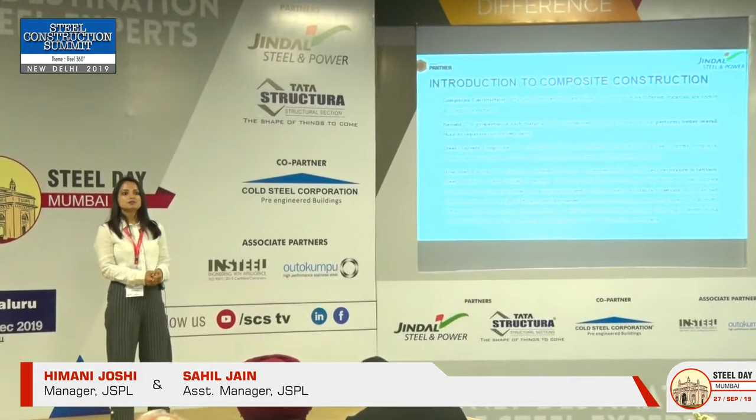Now let's have a quick introduction to composite construction for the benefit of those who are comparatively new to this. Composite construction is a construction which uses two structural members which are made up of two or more different kinds of materials.

Why this is done, what is the benefit of combining two different kinds of material, is that the best properties from both the individual materials can form an aggregate which performs better than how the two units would have performed individually.

So we have seen many types of composites in construction like concrete and timber, steel and timber, but the most common and the most efficient type of composite is the steel concrete composite, and this is what we are going to talk about here. So why steel and concrete?

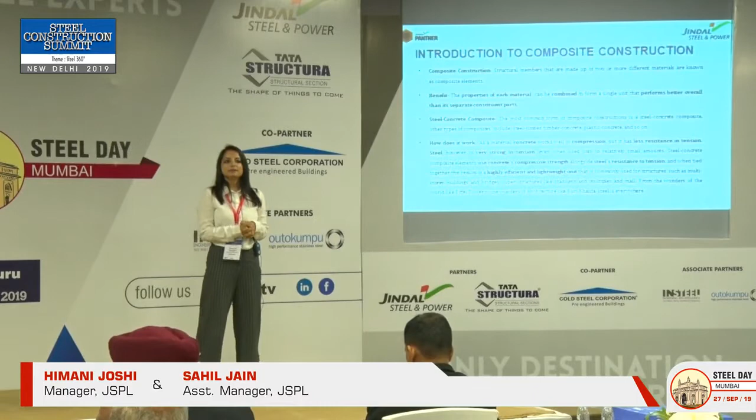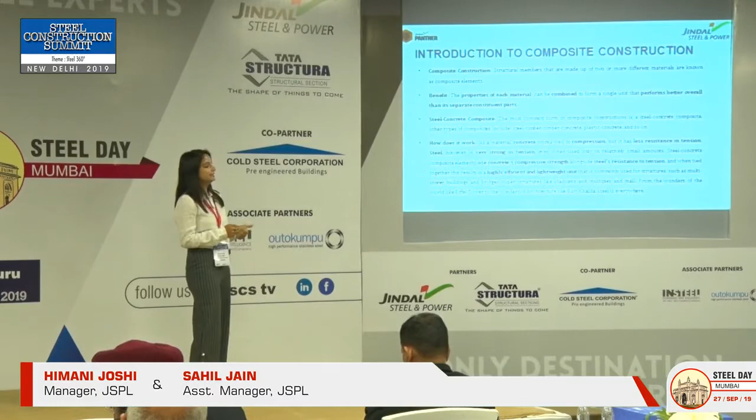Because concrete has been used in construction from time immemorial because of its high compression strength. It goes very well with compression. Steel, on the other hand, has a very high resistance to tensile forces. So when we combine these two, we get a highly efficient and lightweight unit that resists better to both compressive loads and tensile loads, which is what we require for high-rise buildings, complex superstructures like malls, multiplexes, bridges. So this makes it an apt choice.

So we can say that right from the wonders of the world like the Eiffel Tower to the wonders of architecture like Burj Khalifa, steel is everywhere.

So composite construction, let's go into a little more detail. It mainly consists of two basic parts: composite columns, that is steel columns encased in concrete, and the next one is steel beams which support the concrete floor slab systems.

Now in order to achieve a faster construction, even without encasing the steel column, we can go up to 4 floors. And with slab concreting, without encasing, we can go up to 2 floors. So simultaneously, we are doing our erection of the steel columns, and simultaneously we are also doing the encasing. So the concreting part and the erection of steel structures is going hand in hand, which gives us a much faster pace of construction.

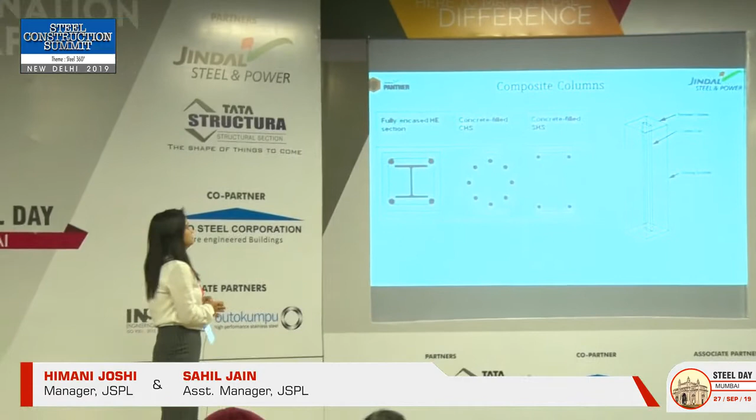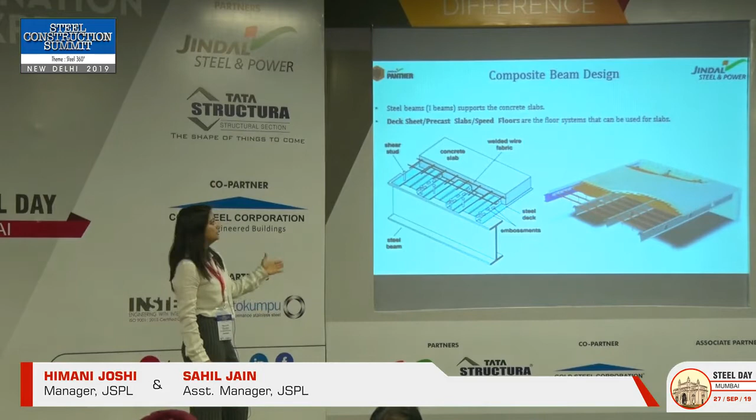Now coming to the second most important component, the composite beam design. A composite beam is a steel beam which supports the concrete slabs or the concrete flooring system. These flooring systems can come into various different kinds. The three most popular of them are the deck sheet, the precast slabs, and the speed floors. These pictures demonstrate how the steel beams support the deck sheet on the left one and the speed floor system on the right one. We will see in more detail about these flooring systems in the coming slides.

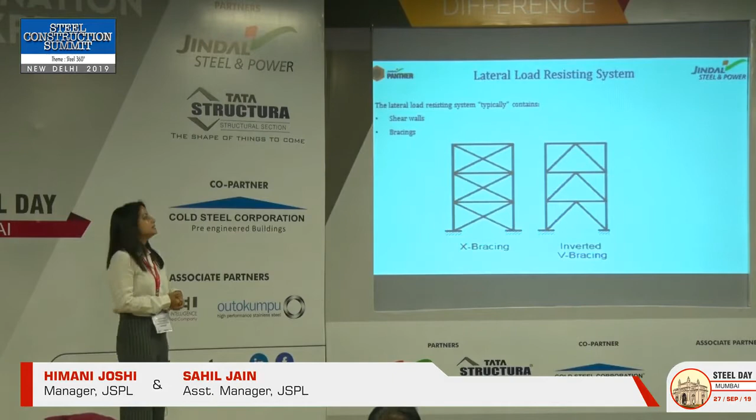The third most important part of a composite construction is the lateral load resisting system, which consists of shear walls and bracings. Bracings come in two types, X bracings and inverted V bracings. V bracings help us save some space in the building.

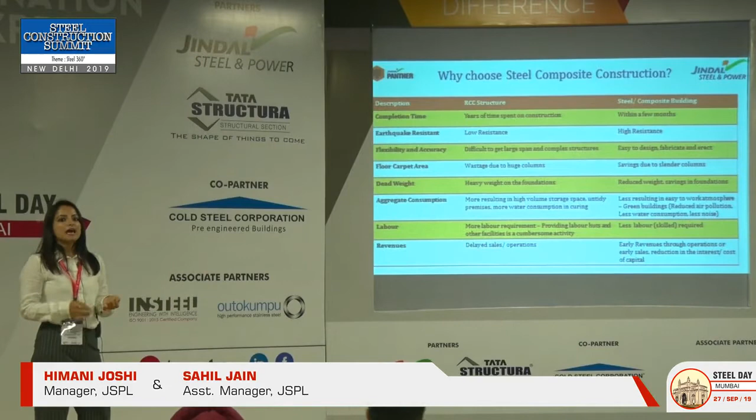So now why choose steel construction? We have formed the basic premise of the advantages of steel construction. It is lightweight, it is efficient, it is stronger, and also it facilitates a faster construction. Other than that, on this basic premise, there are many other advantages which can be derived.

So these are the completion time benefits. It is pretty evident - while a RCC conventional structure takes years for completion, we can talk about completing the same size of composite building within months. Earthquake resistance is better for a steel building due to its high tensile resistance, and then flexibility and accuracy, because we can achieve larger spans for complex structures using steel composite buildings, which is not very possible in a RCC structure.

Sahil, would you like to make a point here? Yeah, about the carpet area with steel buildings, we can increase our carpet area because we use slender columns here instead of using huge columns which we used in RCC. So carpet area can be increased drastically. And about the dead weight, we can reduce the dead weight because we save some weight in the foundation, which will be heavier in RCC.

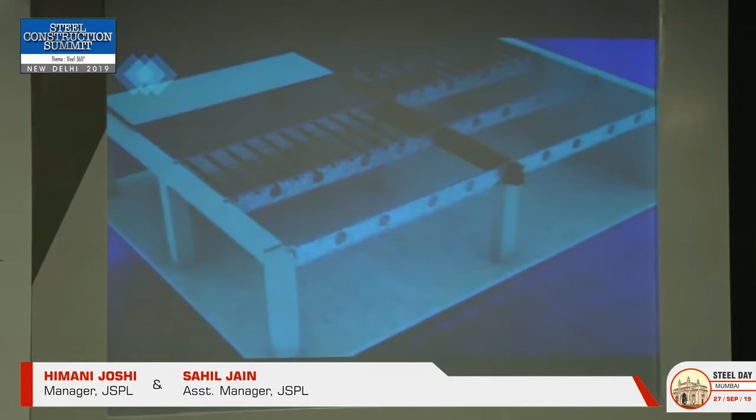An innovative suspended concrete floor system can save building professionals time and money. With no backpropping required, Speed Floor reduces construction time, enabling access up to 3 weeks earlier. Unique cold-formed steel joists maintain strength and integrity while reducing slab thickness, craneage and material costs. Speed Floor's fully engineered system is a proven performer in all types of construction.

Joists are delivered in bundles, craned onto the primary structure and manually moved into position. Lock bars are installed to hold the joists in position. Form ply is then installed.

Steel reinforcement is laid and the concrete is poured. Three days later, the form ply and lock bars are removed and the floor is complete.

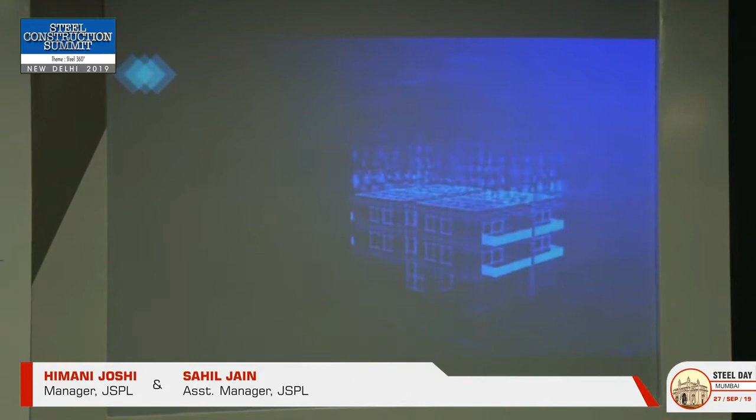Being up to 50% lighter than other slab systems, Speed Floor is ideal for building extensions. It has excellent spanning capabilities and the versatility to run services through the pre-punched holes.

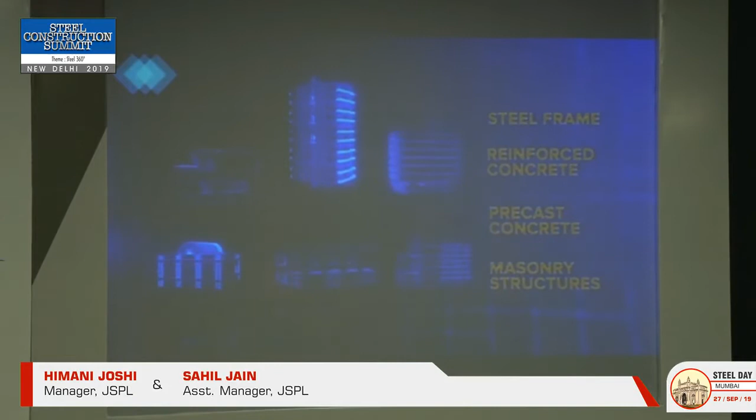Suitable for all types of construction, it is ideal for housing, apartments, car parks, commercial and office complexes. With over 20 years supporting the construction industry, Speed Floor represents the smarter, greener, innovative choice, saving time and money. Speed Floor: lighter, faster, easier.

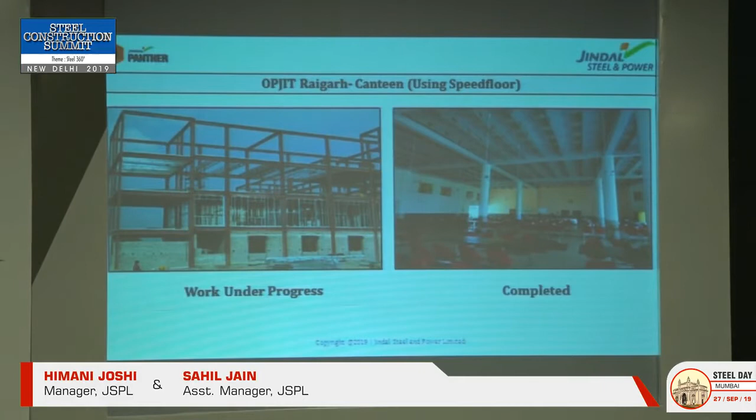So that was Speed Floor for you. Now this is an example building, our own in-house project. It is OPJIT canteen in Raigarh. On the left you can see the work under progress, and on the right you can see how the finished building looks. The ceiling - here we can see the steel joist.

Now coming to the next phase of composite construction, once the finished fabricated structures are delivered to the site, they need to be erected and installed. So we also provide supervision for structural steel erection, and we also take up erection of structural steel in our scope in order to provide our client with end-to-end solutions.

We also provide training to the civil contractors who would be installing the Speed Floor system, as it is an exclusively supplied technology by JSPL in India. We also do project scheduling for our clients for ensuring just-in-time delivery.

So we are more flexible with the flooring system. We don't only use one kind of flooring system - we use three kinds: Speed Floor, which we have seen before, hollow core solid slab system, and the third one is deck sheet, which you might be aware of. There is a video for the hollow core slab which I will skip.

Steel comes with sustainability, affordability, and durability. As the steel can be recycled, rather than paying money in landfill fees and other costs for non-construction waste, it would be better that we use steel because it can be recycled. Steel is durable and requires low maintenance.

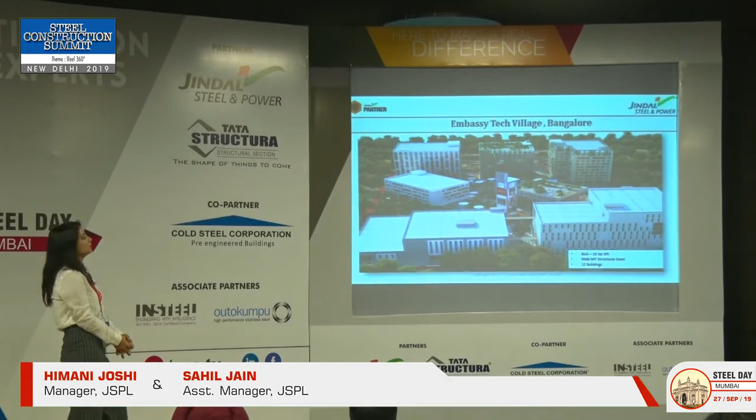Now some key projects with deck sheet. This is a fully functional building now, called the Embassy Tech Village in Bangalore. It has been occupied and is in full function. It was done by BL Kashyap.

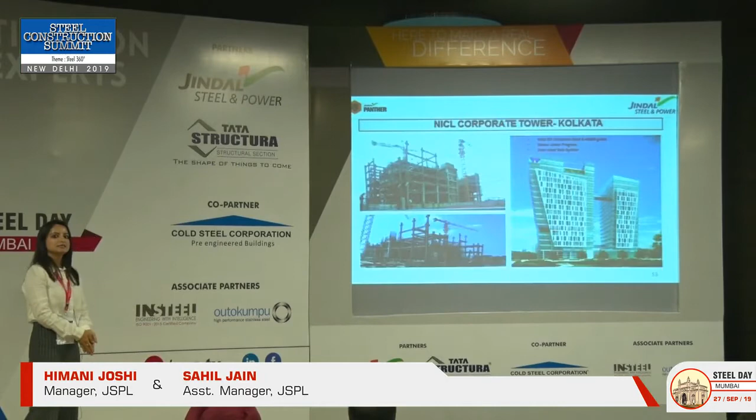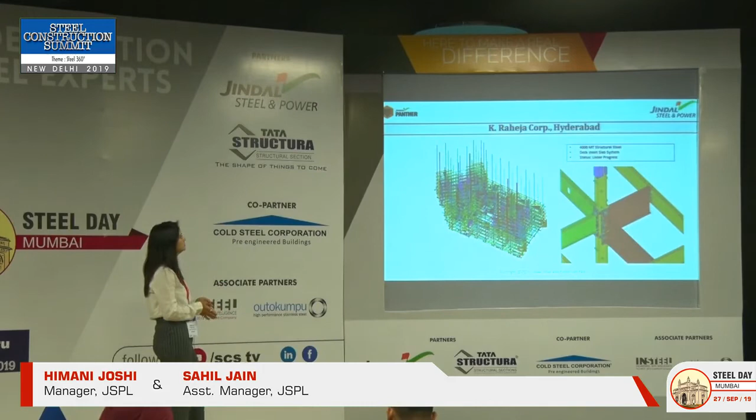It is just beginning. A few other projects: Oppo Manufacturing Complex, which we did in Greater Noida. DPS Jhansi, a small project but nevertheless a very prestigious one. Vijayawada Airport New Terminal Extension.

Now for the journey of the construction solution business, we would like to take you through Mr. Ajay Agarwal, who is one of the founders of CSB, and let's hear it in his own words.

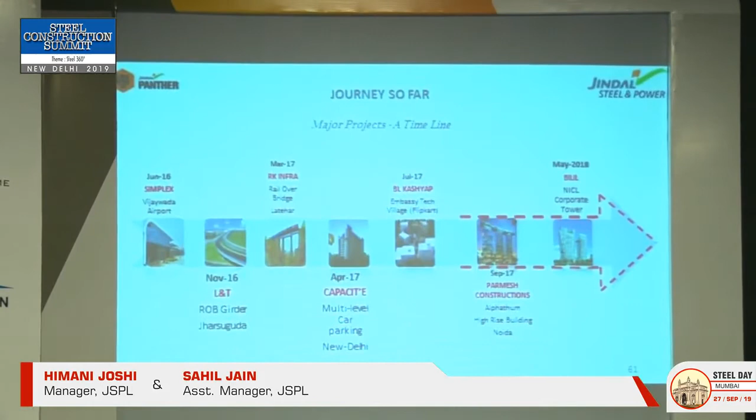I just wanted to brief you about the journey of the construction business in JSPL. We started with composite steel structure buildings in the year 2015, and the first building we got the order for was Festival City at Noida, which was supposed to be done in 99 days. However, due to some constraints, we could not complete the building, but in 3 months we did 14 floors, and that was quite a remarkable achievement.

Since then, we went to NBCC, we gave the presentation on composite buildings, and in 2016 they in turn gave the presentation to the PMO, where the PMO has issued guidelines to explore the possibility of construction in composite steel buildings in all the government buildings.

At present, we are doing 3 NBCC projects: one in Calcutta for National Insurance, and 2 skill centers, one in Nagpur and one in Kanpur.

However, in the private sector, with the developers, we have done quite well in Alphathum, Noida. After doing 2 towers, we are again doing 2 more for them, and then we have done Embassy Tech Village through BL Kashyap at Bangalore. Rahejas, we are doing at present in Hyderabad. We have done many more projects.